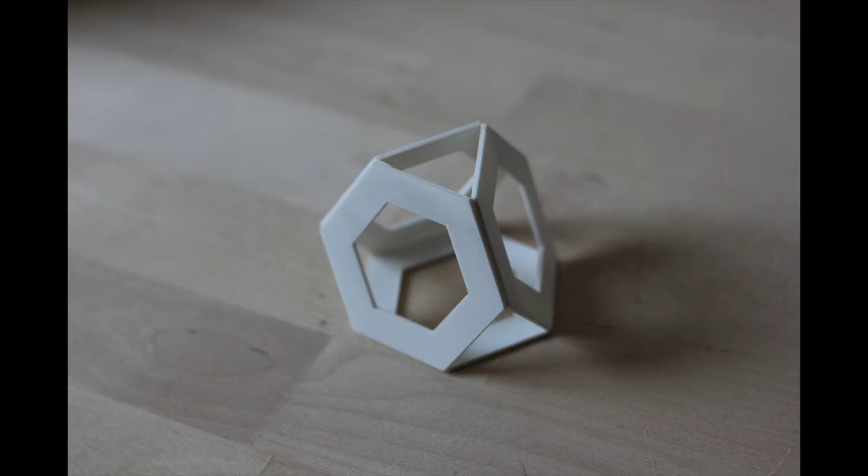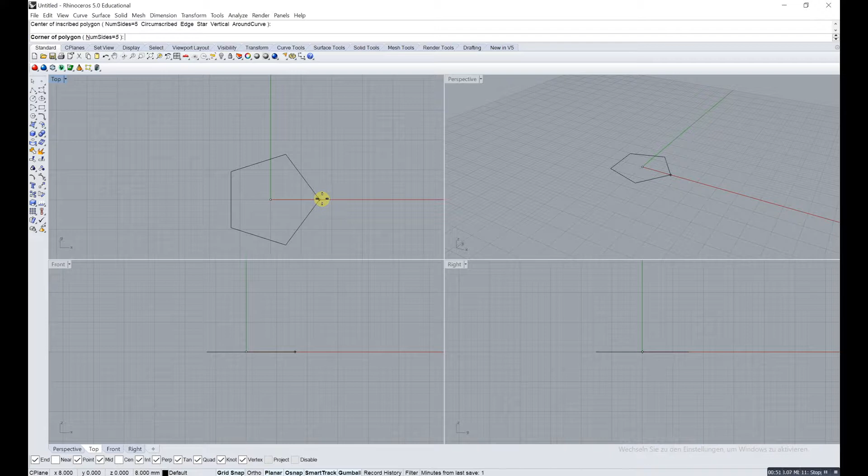So we just start with the base plane. We take a polygon and put it onto the center. As you can see, it's a 5-point polygon, so we have to change that to 6-point. We go into the line, click on number of sides, click on 6, click on enter, and we have 6.

Now we just have to measure how big it should be. It needs the measurement between the middle point and an end point. This should be 30, I guess. Yes, it is 30. Click on enter, and we have the ground polygon.

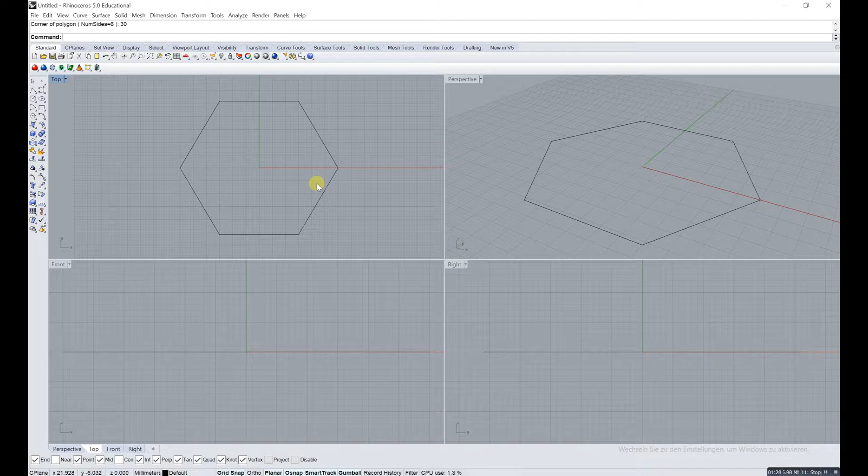So what we do now is an offset. Let's just type offset. So what we're able to do is an offset now. I just made a mistake there - the distance was only 1 millimeter, I didn't change that. So just type offset again.

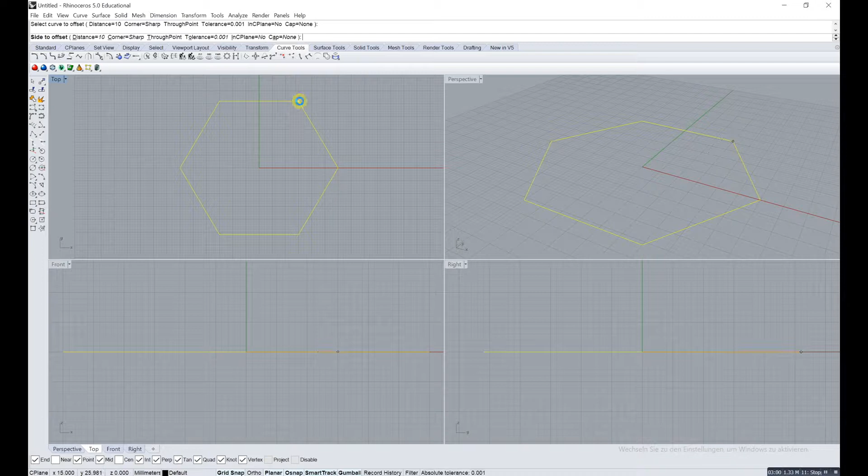Change distance, put on distance - it should be 10. We could do both sides, so it offsets to both sides straight away, or we could use one side. Let's click on both sides and have a look what's happening. Now we're just gonna delete the outer one and have the ground plane, kind of.

So what we have to do now is fill that one to a surface from a planar curve, which makes a surface here.

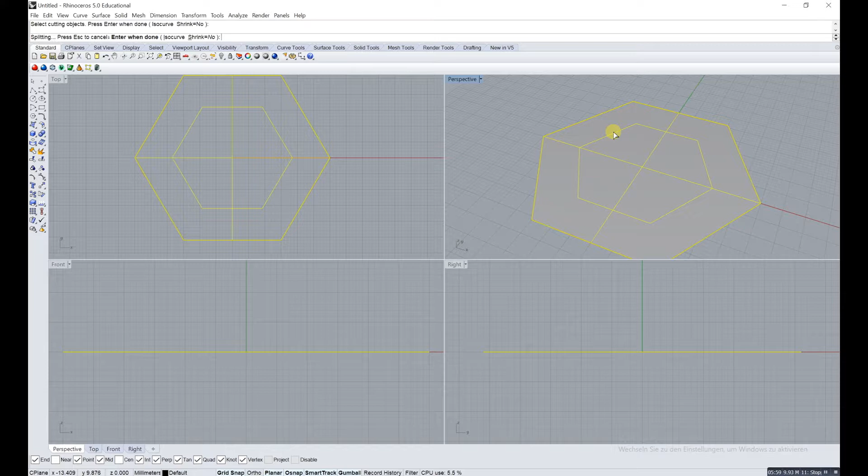Now we're gonna use split. Select the objects to split, put on enter, and put on the cutting object, which is the inner one, and put on enter. Now you have the split one. You can delete the one on the inside, and it does look a lot like it should.

There could also be another way - you could have done the filling already during the offset, but we just did it like that right now, and I hope it makes sense.

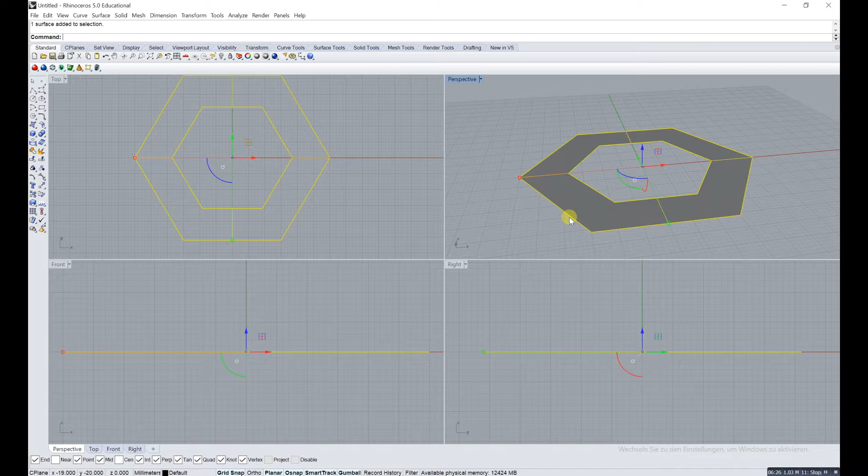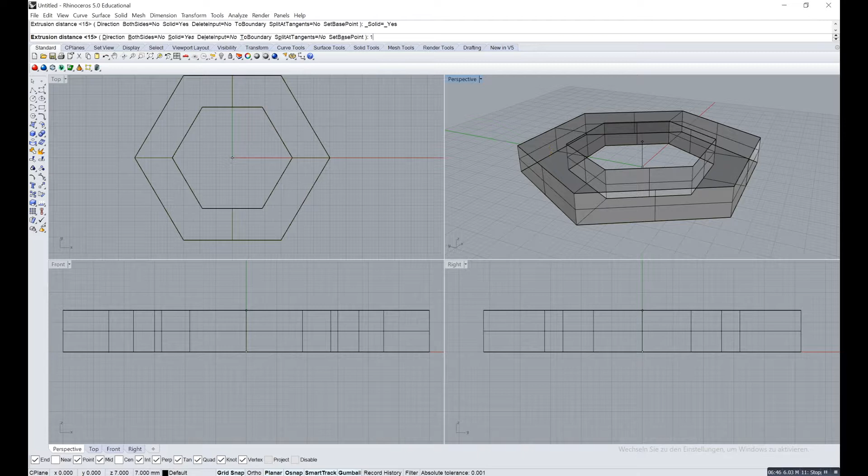We're just going to delete the curves now because we don't need them anymore. Now we can do an extrusion and get the distance, or the thickness of the material, which we have in real life also. We're just gonna do 1 millimeter. Now we're just gonna delete the surface underneath it, and we just have the extrusion.

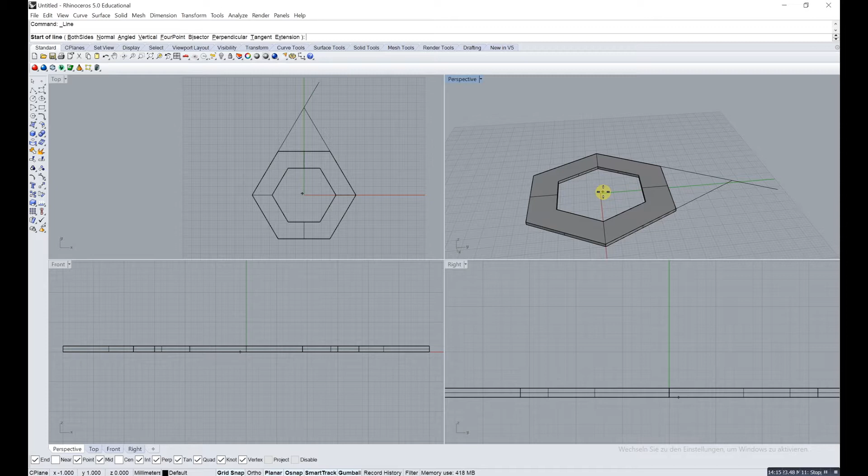Now I'm gonna draw a line. I really had to think about this for a bit to get the right angles. We have to do a straight line from the middle point. It's really good that we started straight in the middle, because we don't have to measure that out anymore.

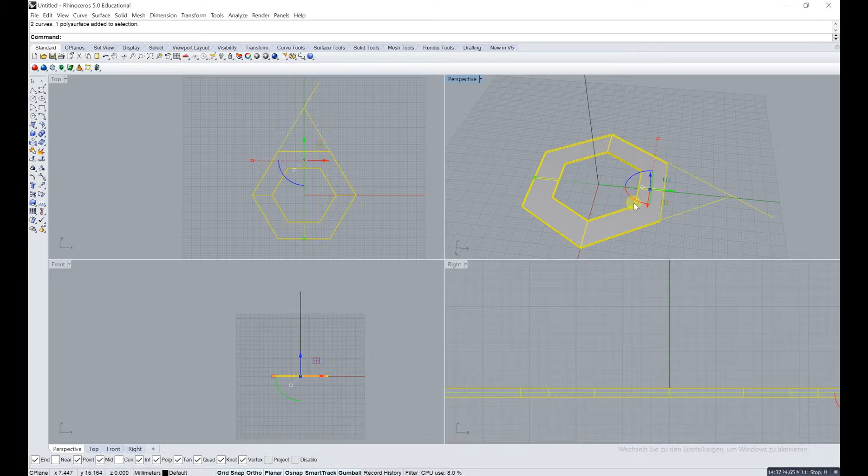Just do it from the right view - it's probably the easiest. You can put on ortho, then it shows that it's straight. Now you're gonna copy the geometry, the two lines, so we can move it to the side and rotate it. That's probably the best I came up with right now, most accurate.

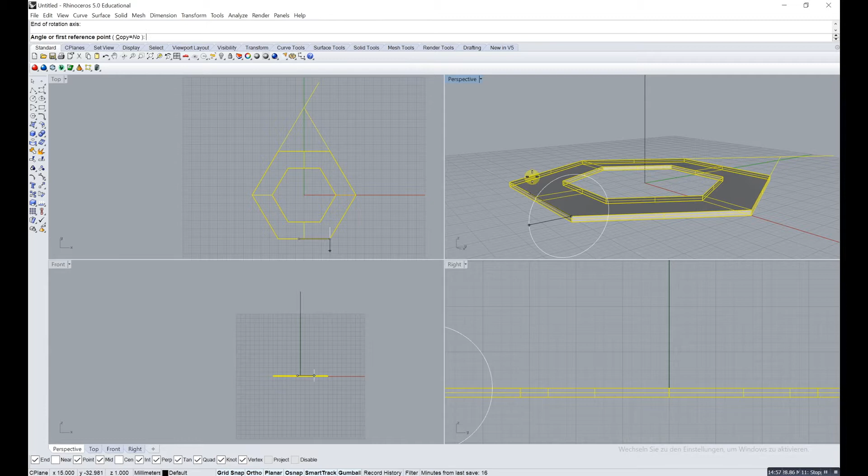So we just have to use rotate 3D, so we can do the axis there, as we just did, and then use the whole thing and rotate it up. What we're going to do now, which I just did wrong, is start the axis in the middle of the module to get the endpoints of the two lines.

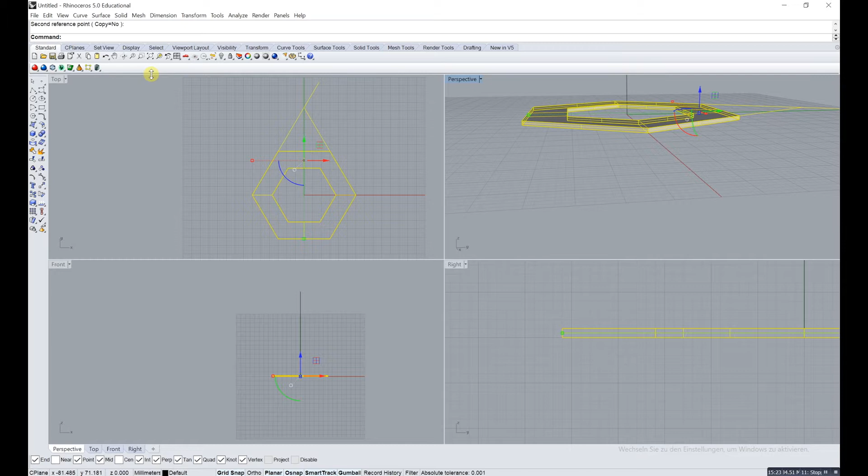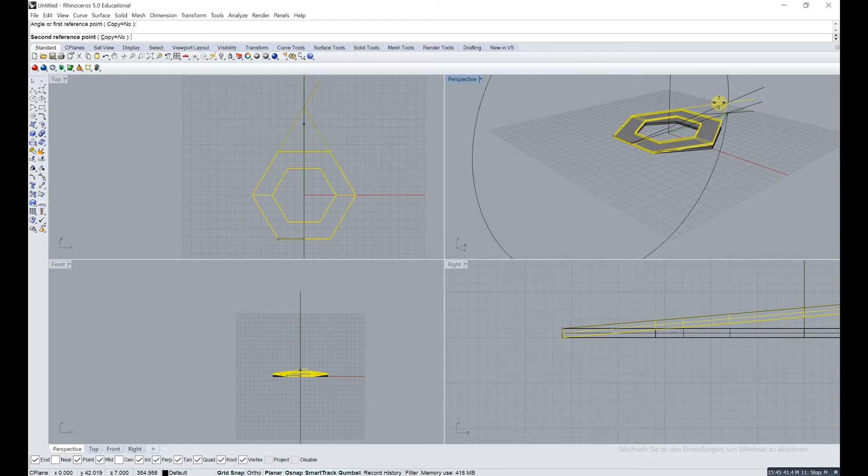So just do rotation 3D again. Just do it again - I did it wrong again. So that's your axis, your endpoint, and use this endpoint, and now you're able to bring it upwards.

So I did this one in another view and turned off grid snap. So you're pretty close to where you could get, but it's not 100% accurate.

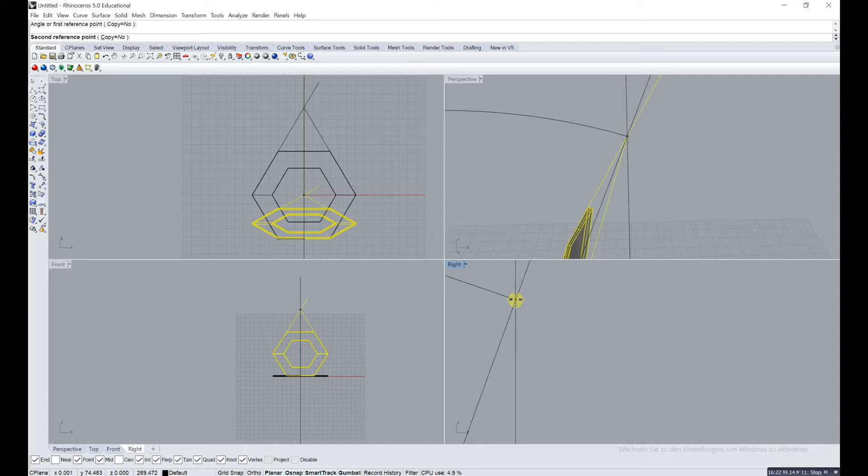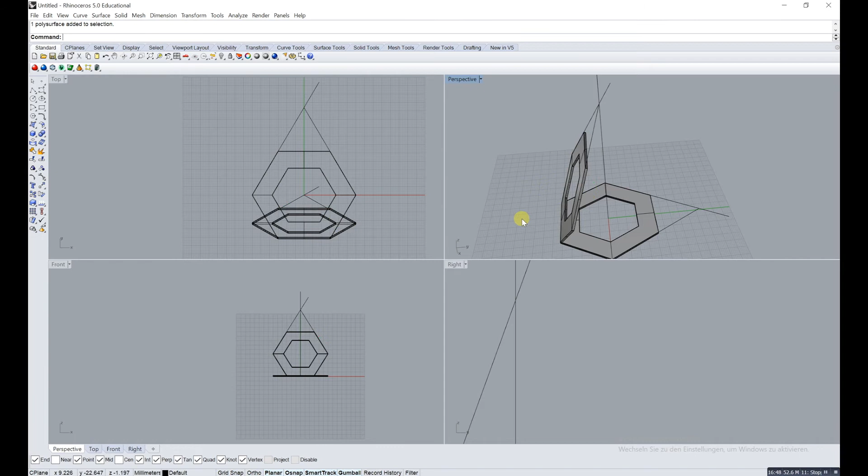So now we can rotate this one around the X. Just use normal rotate, because normal rotate always rotates in the plane - the plane you see is the big grid with the red and green lines. In later tutorials we will see how you can do this a different way.

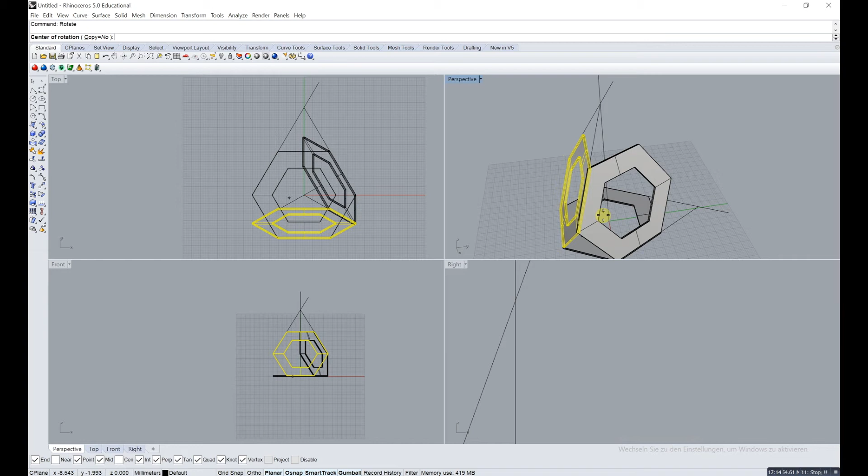You can change that, but right now we don't use that, so just turn it for 120 and the next one for minus 120. Just do the same thing again. I did 120, which was wrong, so just do it again - just do another 120. Now it does look pretty good.

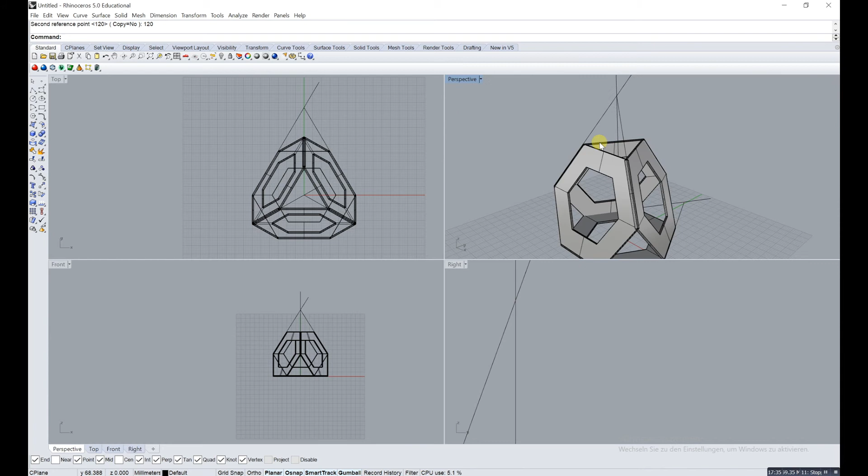Now we just have to delete the lines, get rid of the stuff we don't need, and as we can see it does look pretty good. There are some overlaps here which we can see are because of the problem - it's not in the right position on the lower part.

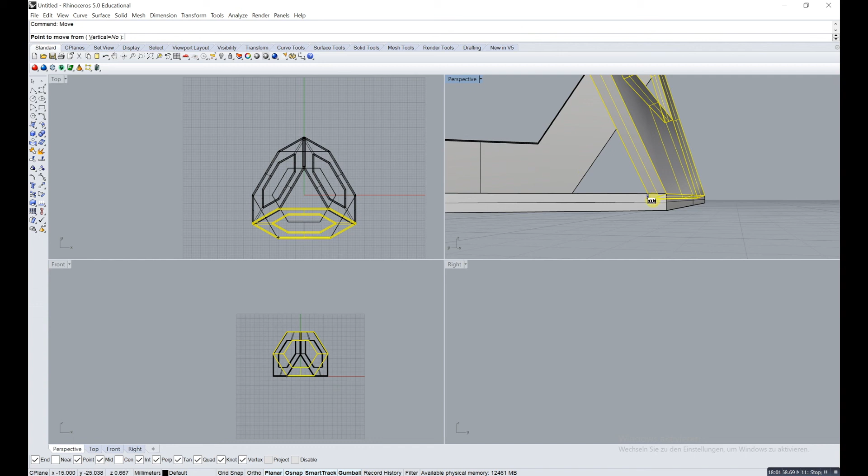So let's just do move - just type move - and move the corner to this corner, and do that for all three. Then it looks really good.